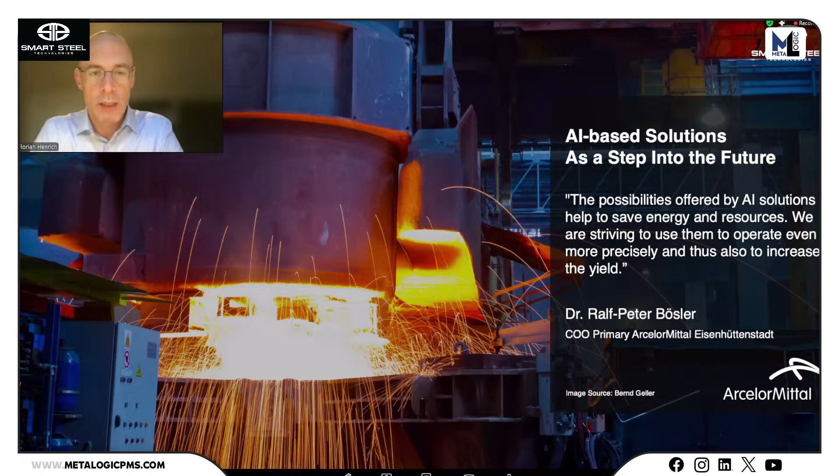Before I go into the challenges of midterm planning and short-term scheduling, I would like to point out that I'm very thankful to our cooperation partners in the steel industry. These include ArcelorMittal, a leading steelmaker with whom we are cooperating since a long time, and this also includes ThyssenKrupp Steel, another leading steelmaker with whom we are cooperating also in the range of production planning and scheduling. We are very thankful for our cooperation partners in the industry.

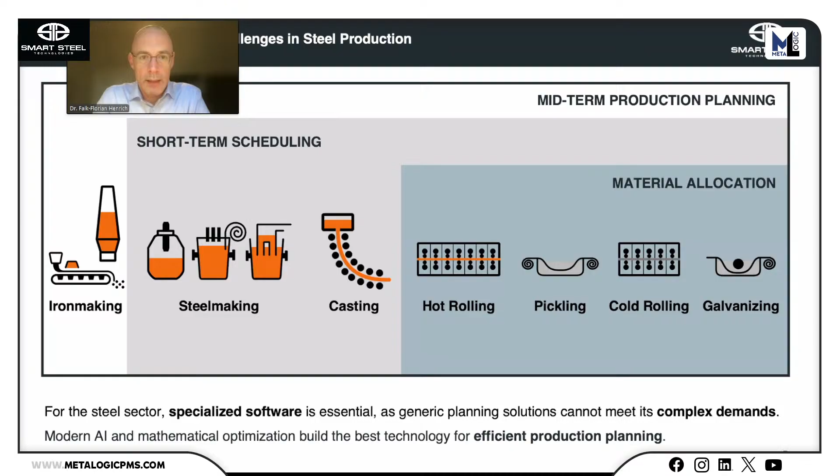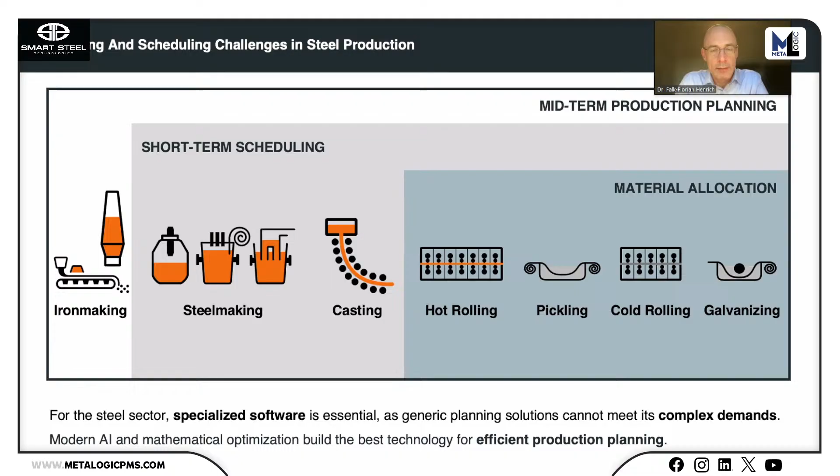When we talk about production planning and scheduling, these challenges can be categorized into so-called midterm production planning challenges, where we aim to create a good midterm plan for the next couple of weeks or even months for our production, and short-term scheduling challenges, where we aim to come up with optimal casting, rolling, galvanizing, and other types of programs.

For the steel sector, I think it's a crucial point to use adequate specialized software and models, since generic planning solutions often do not meet the complex demands of steel production. Therefore, our approach that we would like to explain in this webinar is how to use AI and mathematical optimization to come up with solutions to these challenges.

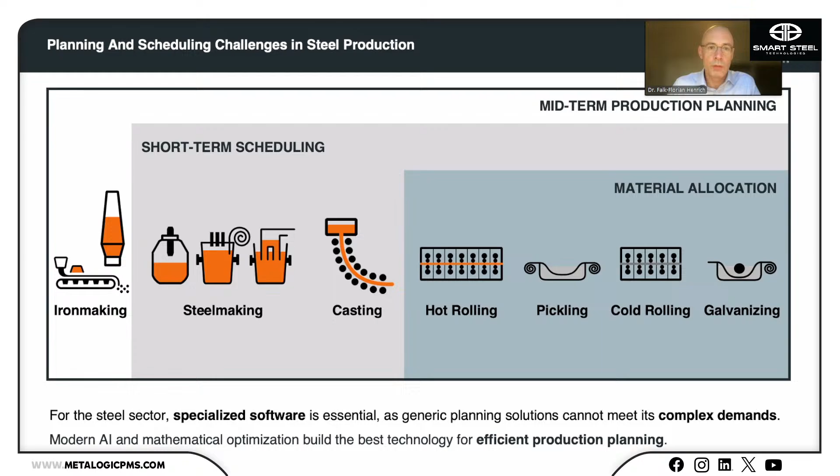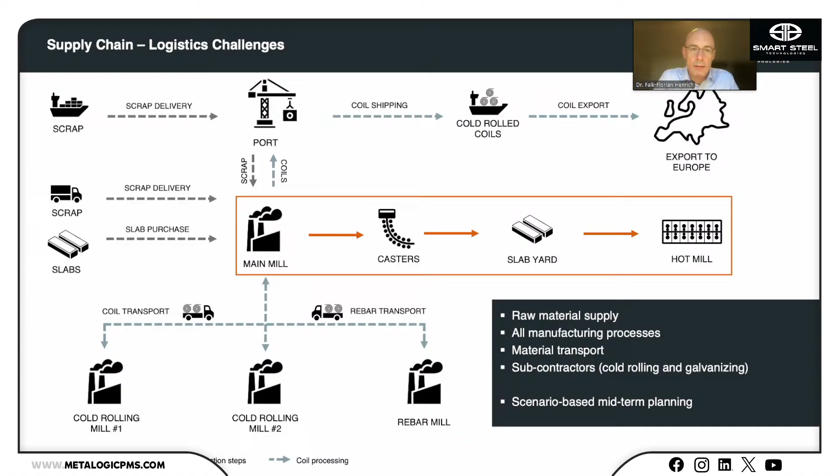So what are the typical midterm planning challenges? Here we can look at this example of a supply chain. In this scenario, we see different logistics challenges. We assume that we concentrate on the main mill, caster, slab yard, and hot mill, which are depicted in this red rectangle.

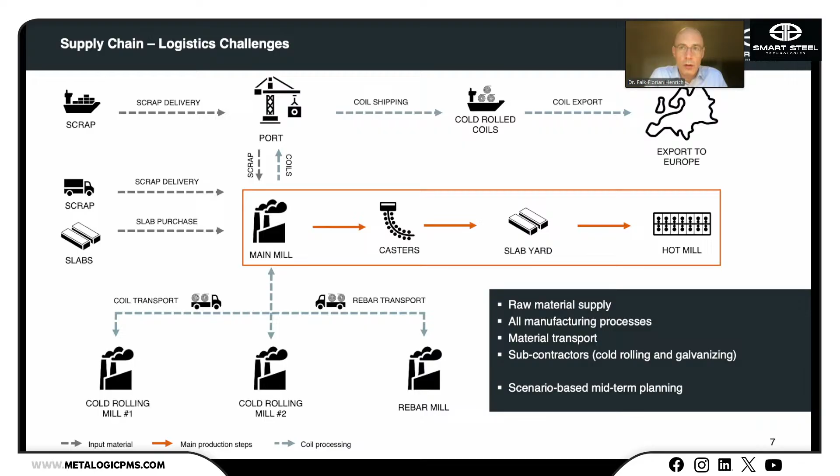But we also have to consider raw material supply, and all manufacturing processes, even if we outsource some of our cold rolling activities to certain mills depicted on the bottom of the slide. We do have to take into account material transport, like moving coils from our main mill to some cold roller.

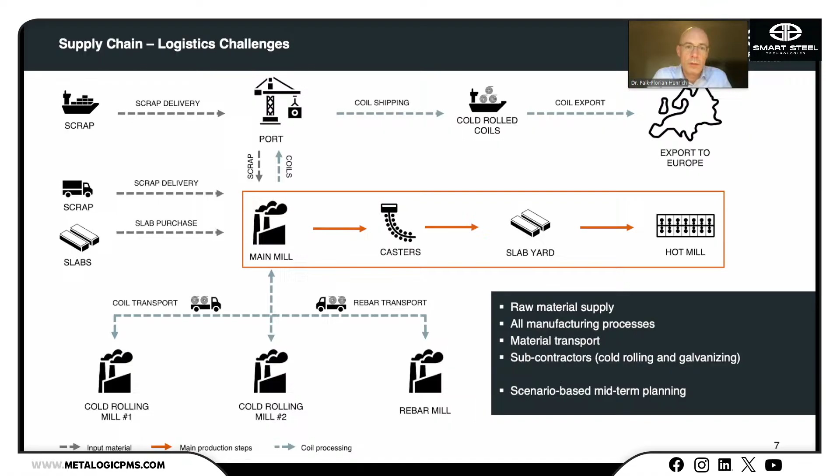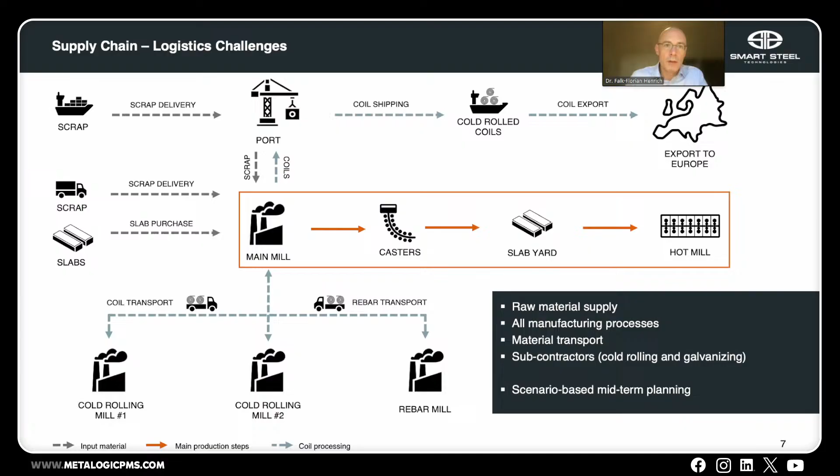And we have to try to come up with realistic scenarios, for instance about scrap supply, slab supply, and also about sales. So the key here is that we have a very complex network of production, and to come up with a realistic midterm plan for the next couple of weeks, we must use a scenario-based approach where we can input into a model certain assumptions of ours about supply and sales, and then have a good mathematical model compute the feasibility, effectiveness, and efficiency of a certain scenario.

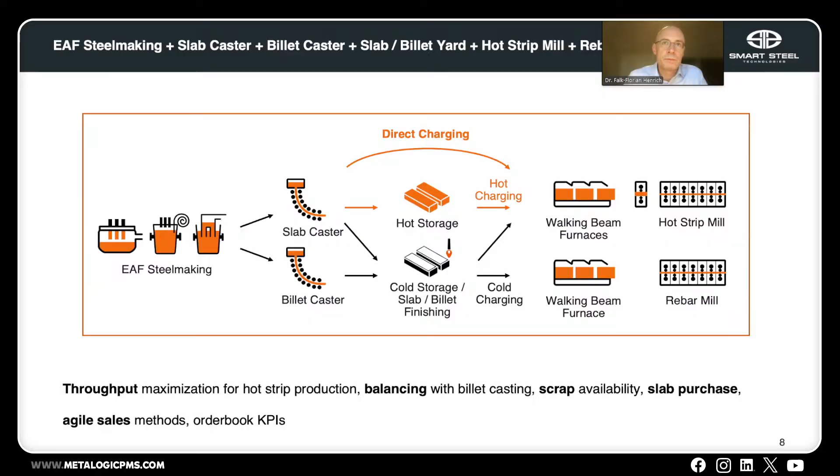So let's come to another challenge. This time we focus on this red rectangle which was depicted on the previous slide. If we look at this part of the production chain in detail, we have the electric steelmaking here, the casters, the beam furnaces, and the rolling mills. Here we have to take the challenge to balance different castings, like billet castings and slab castings, scrap availability, slab purchase, and the sales.

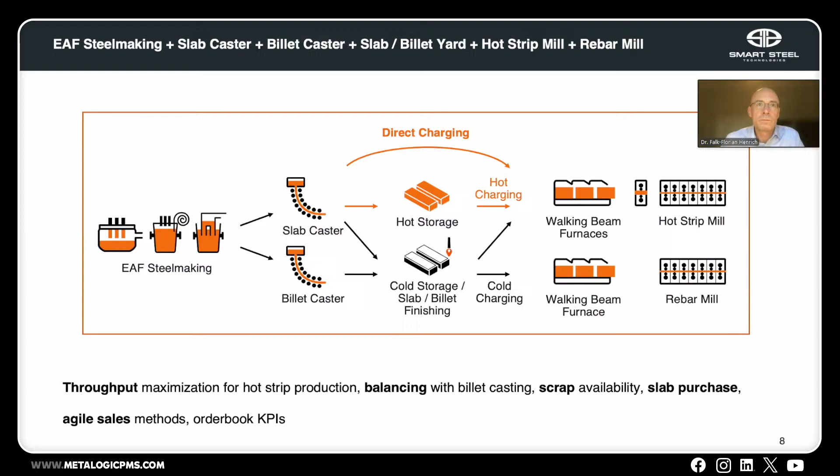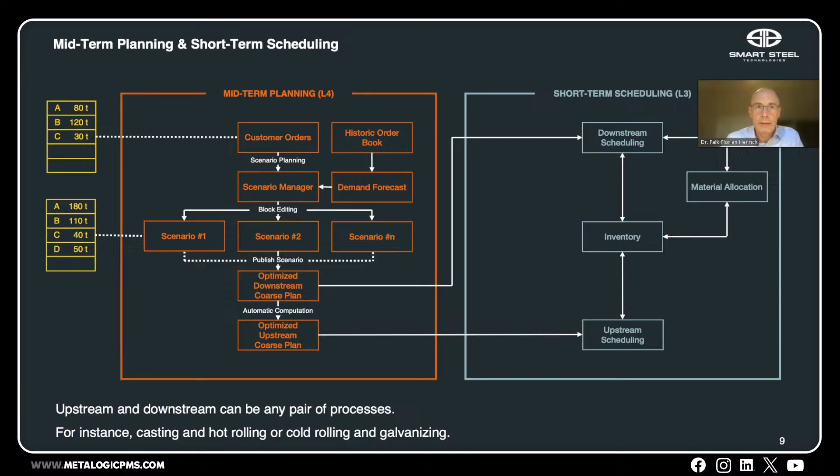Then the job of a mathematical model would be to create optimized downstream and upstream plans and also output their feasibility and associated business KPIs. This is the basic idea of scenario-based midterm planning and short-term scheduling. We'll then take advantage of these prepared coarse plans, and this is directly where I would jump right now into the challenges of short-term scheduling.

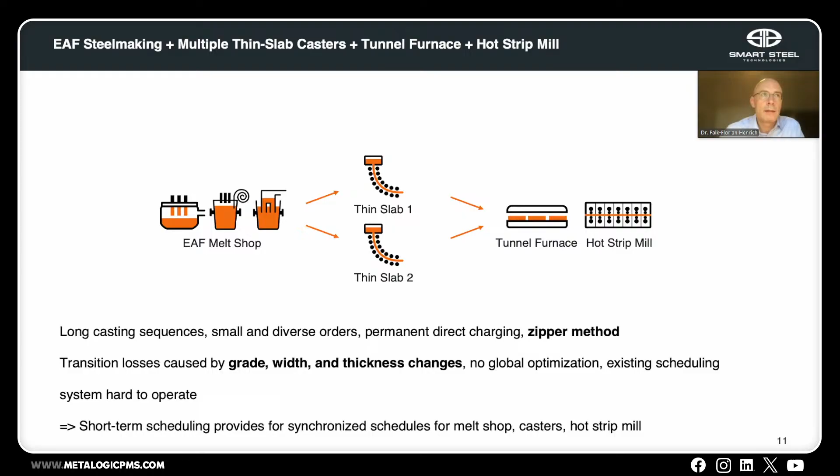And these are quite diverse. For instance, on this page, we see a setup where a steelmaker runs an electric arc furnace melt shop, and then two thin slab casters, tunnel furnace, and a typical hot strip mill. In such cases, often the grade changes, width changes, and thickness changes create a challenge, and we want to have very long casting rolling sequences, while at the same time minimizing those changes.

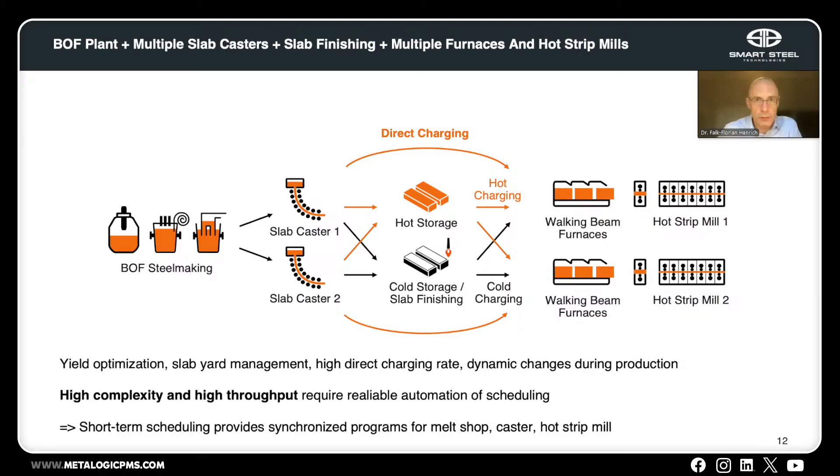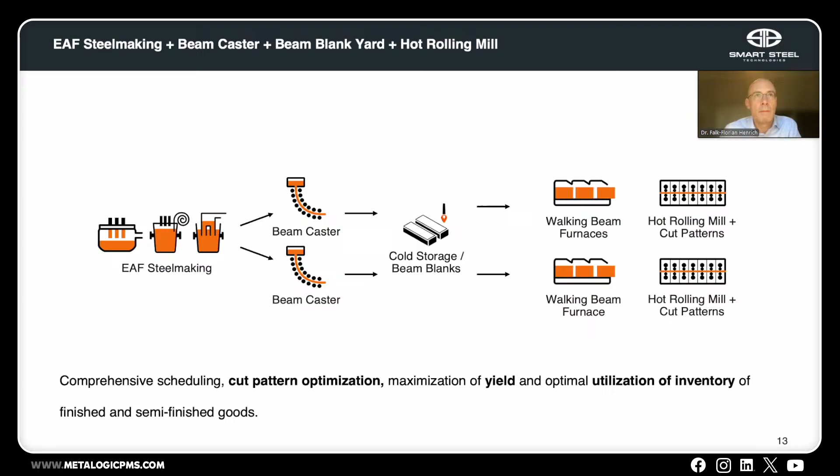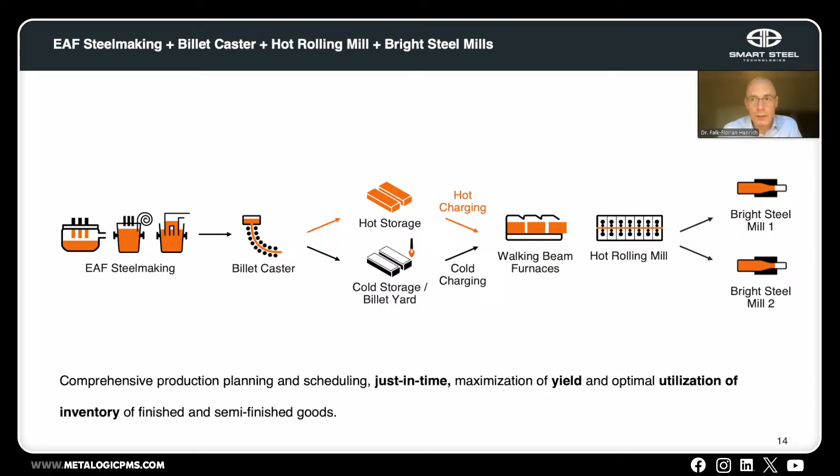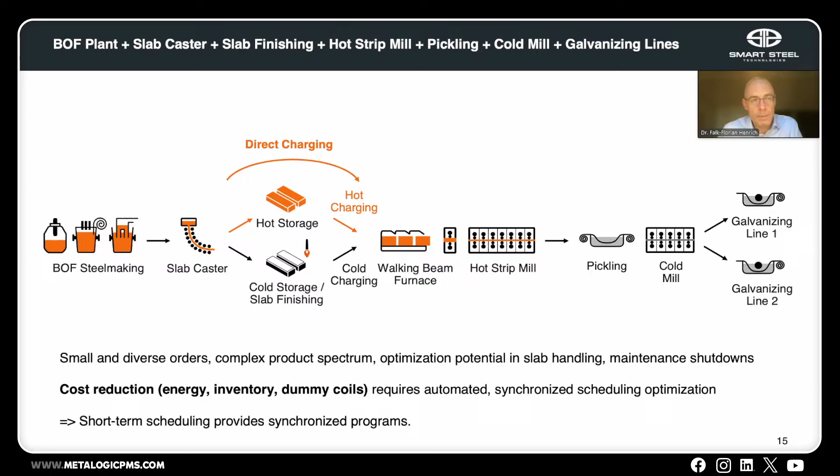And another example, an integrated steel mill with BOF shop, slab caster, hot strip mill, pickling, cold rolling, galvanizing lines. In this case, the main aim is to optimize cost, save energy, improve inventory usage, and avoid so-called dummy coils. So the message I want to bring across is the challenges are very diverse and really depend on the individual case.

When we talk about inventory, we have to find a way for allocating unallocated slabs and coils. This is one important point because it appears in every setup basically, and I want to point this out using this graphic. We see the material flow on this page. In particular, we need an advanced model to automatically consider non-standard production paths.

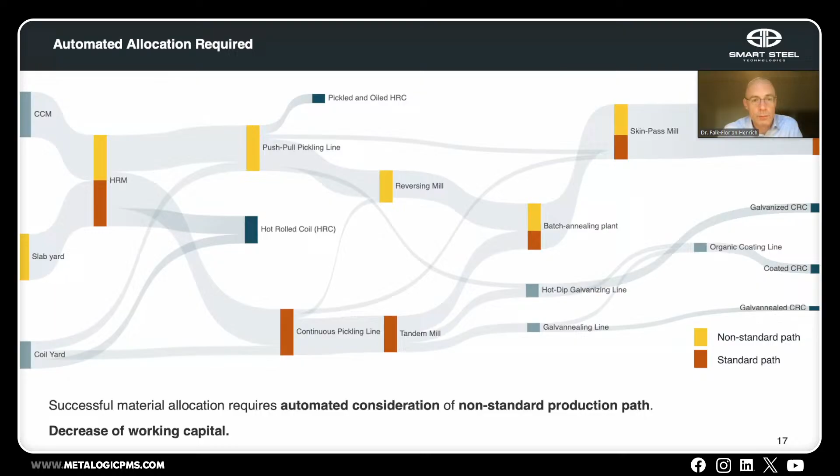So for instance, the red boxes could be the standard production path, starting with some slab and ending with some cold rolled coil. But for our reallocation of unallocated slabs, we might need to go the yellow road, and this is an important point. This should be chosen by an advanced model and should be automated as far as possible.

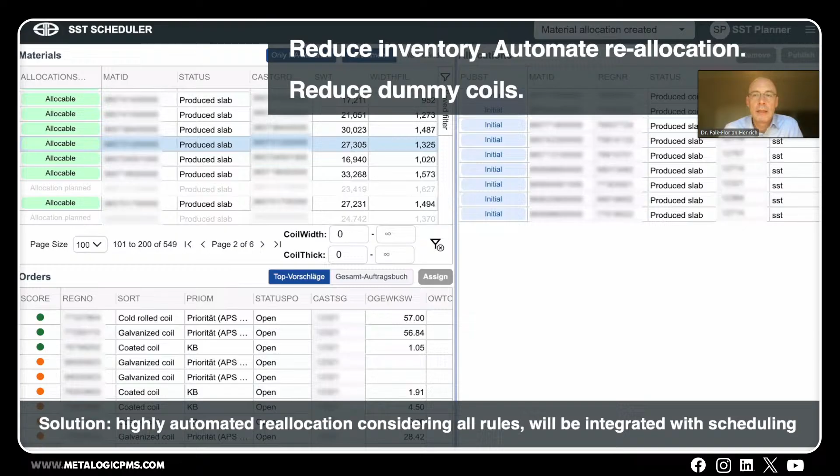Then we also talk about the topic of dummy coils. This terminology means sometimes we need to insert extra coils into certain processes to bridge certain changes and transitions, and this can also be mitigated if we use advanced models for reallocation, avoiding producing coils just to bridge something.

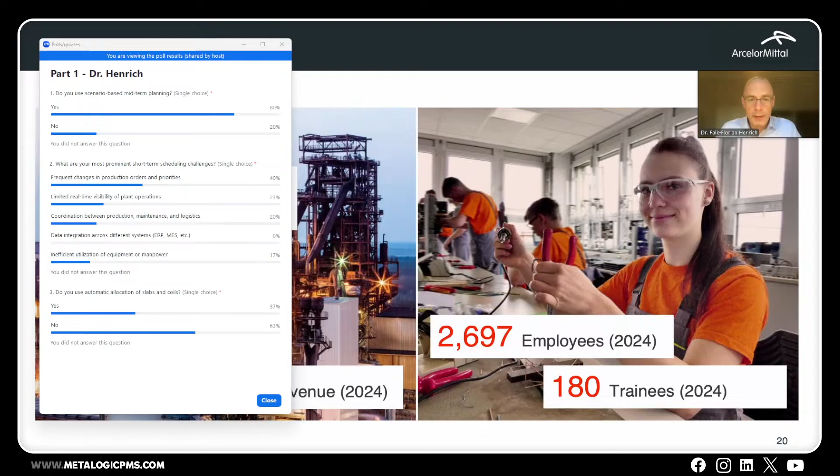Dr. Henrich, would you like to comment before we start the next poll? I think, regarding the second question, I would also agree that changes in production orders and priorities, and in general order book changes, are really a big challenge. So I appreciate the feedback.

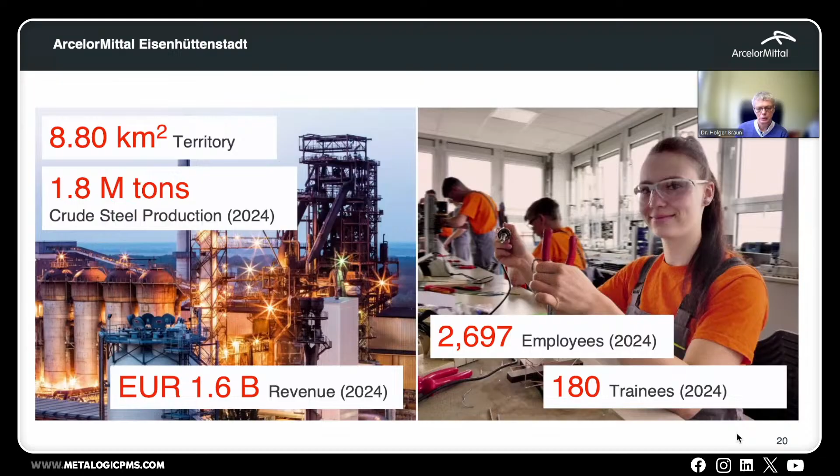On this slide, we depict the cooperation which we started together, Mr. Braun and ArcelorMittal and SST, which can give you a background on what we can learn for the scheduling.

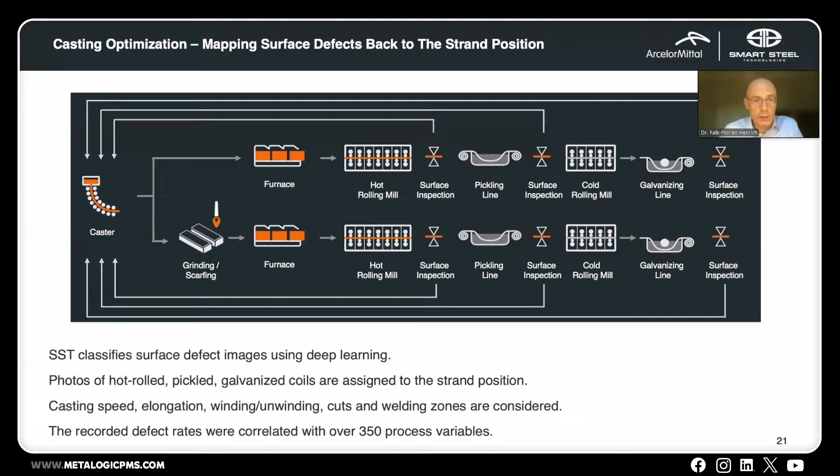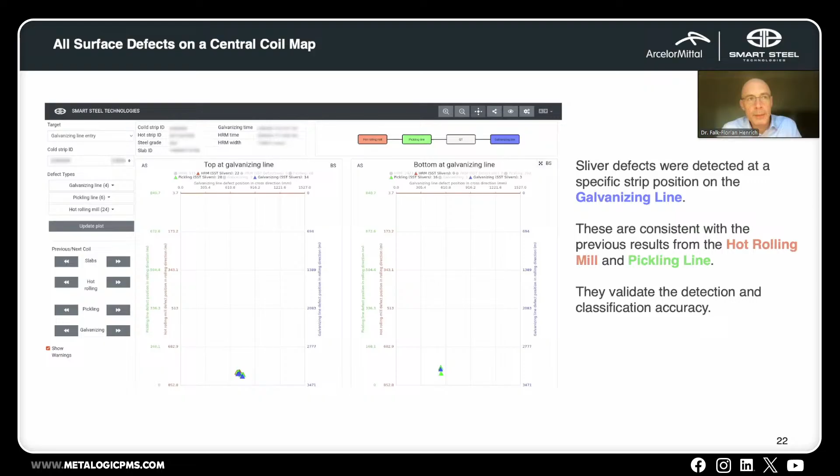This kind of mapping, detection, and classification was key in our effort to optimize production stability and quality.

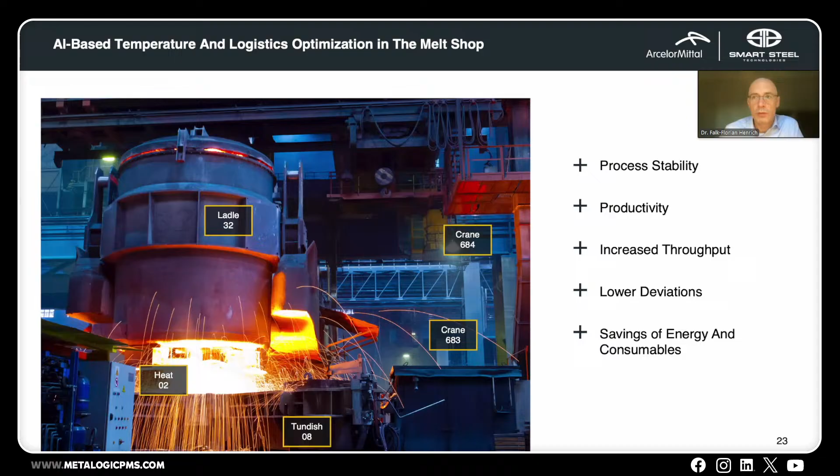Another ingredient has been, or still is, AI-based temperature control and guidance in the melt shop, which is depicted on this page, where we take into account heat, ladle, cranes, tundish, steel grade, all kinds of inputs, and therefore have AI-based models for better process stability, productivity, throughput, and in the end also for saving energy, because these enable us to make the tolerance band, for instance for temperature, much tighter, and this reduces deviations and moves us very close to the optimal temperature control in the melt shop.

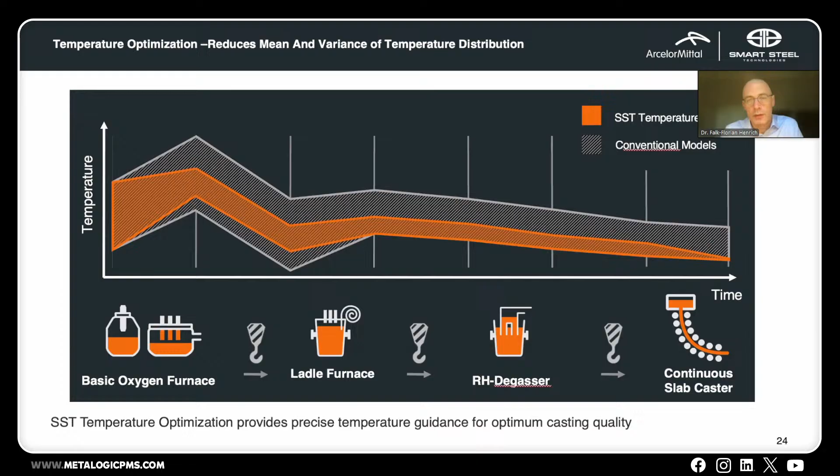And this really enabled these results. Dr. Braun, maybe you would like to comment on those.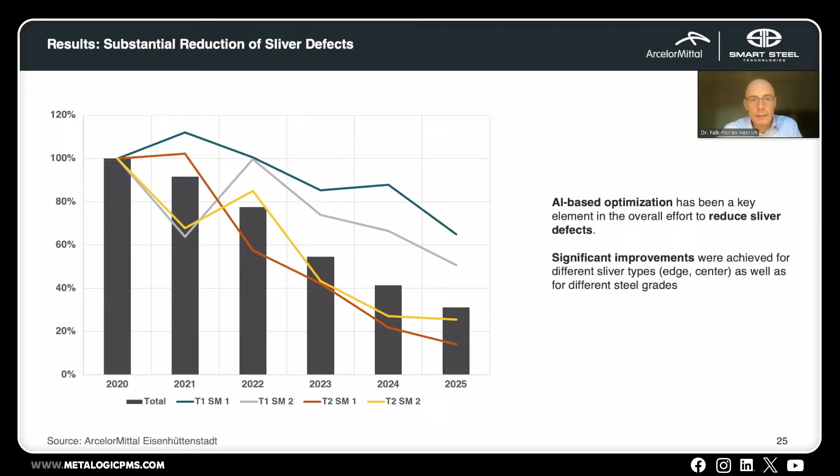Based on these results, we then also entered together into the topic of caster and hot mill scheduling, because we all saw big potential in that area based on the results. Maybe Dr. Braun, you could start explaining this situation.

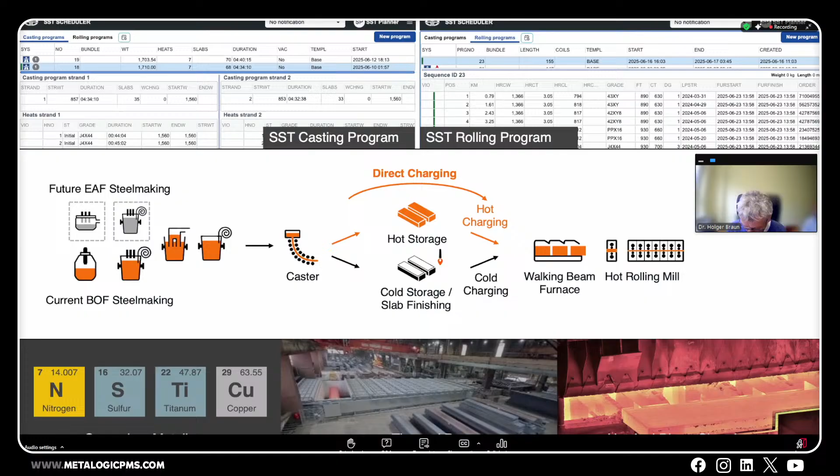I explained already before that we have a complex technology. This is mainly based on our order book. We have a very good situation in terms of coupling the caster or steel plant and the hot strip mill. Technically, we are very well prepared for direct or hot charging of slabs to the hot strip mill. We also implemented a hot storage for slabs last year on our site.

But the problem is to synchronize the sequences in the steel plant or the caster with the sequences we have in the hot strip mill. This is mainly related first to the priority of the order book we have, and also to the requirements and the quality of our products. This is the reason why production planning is crucial, because every degree or every slab we can charge with increased temperature to the walking beam furnace at the hot strip mill gives a huge effect on energy consumption, on CO2 emission, and in the end on costs.

And this situation became even more complex with the implementation of the hot storage boxes that we implemented, because the full advantage of this charging or hot storing of the slabs will only come if there is a proper planning on how to put slabs in which box, and in order to avoid this frequent opening of the boxes and losing energy.

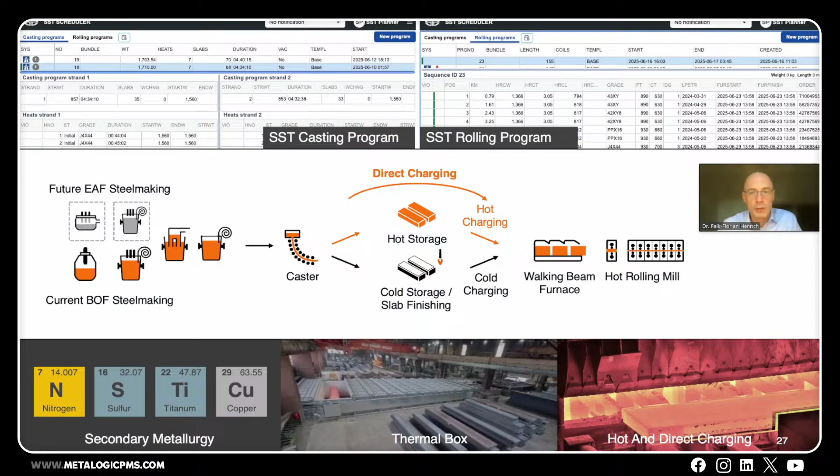And this is again where we, in our cooperation, apply those advanced models. Good. Then we are ready with our part.

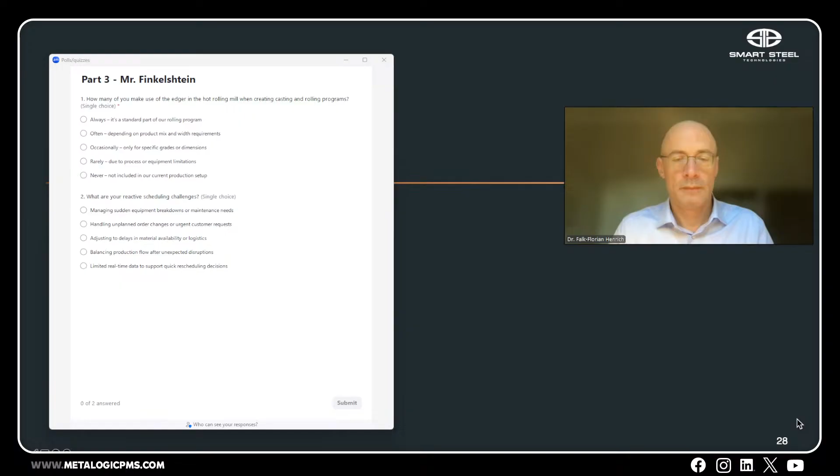Thank you, and thank you to Dr. Henrich and Dr. Braun for giving an overview of multiple challenges that are connected to scheduling and midterm planning. I want to focus on just one rather seemingly simple case, just to highlight the challenges that arise and the need of digitalization and using AI and mathematical models, because already on this seemingly simple case, doing it half manually is very difficult. So let's go to the next slide.

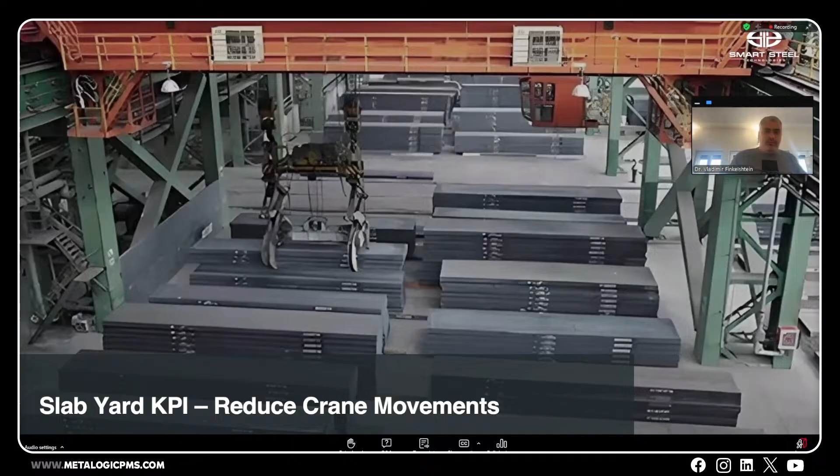And it's a little bit related to the connection between casting and rolling and to the thermal box. So we want to improve a little bit the slab yard, yes? And the slab yard is sometimes, maybe very often, a bottleneck because it doesn't always look so tidy as in this picture. And let us try to understand why it doesn't look so tidy sometimes on the next slide.

In many setups, we like to cast wide to narrow. The caster would cast the first slab very wide, the second slab narrower, and the last slabs very narrow. We also like to roll wide to narrow very often, which creates a problem because when we use a slab yard, the first slab, which is very wide, would go to the bottom of the stack, and the last slab, which is very narrow, would go to the top of the stack.

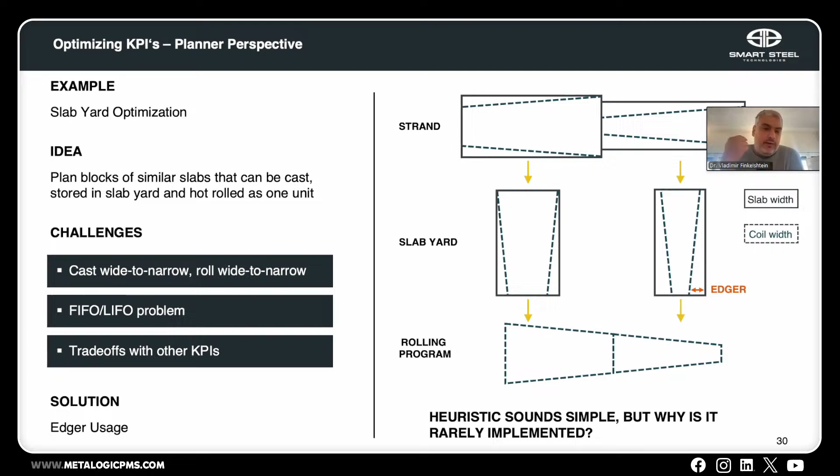And if we want to roll the first slab to be the widest, we would have to dig it from the bottom of the stack. This means that this is not ideal, and we would like to solve it by planning blocks of similar slabs, where we do not have to reorder the slabs according to their widths.

So this idea of planning blocks of similar material is very common and everybody likes it, but I would like to highlight why it's a little bit difficult to execute.

Most, as far as I know, most of the plants have an edger. An edger is a device in the roughing mill that allows us to reduce the width of the slab. So we can cast a slab that is a little bit wider than our final hot rolled coil. We have a little bit of room to play in deciding how wide our slabs are going to be cast.

The idea is depicted on the diagram on the right. With the solid line, we show the slab width, and with the not-solid line is the coil width. We would like on the strand to produce something like 10 slabs of constant slab width, but in such a way that the coil width is slowly decreasing, and this difference would be resolved by the edger.